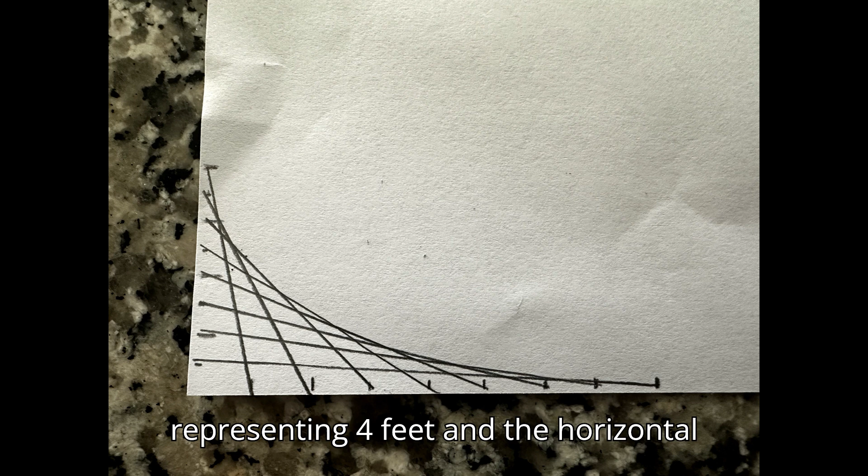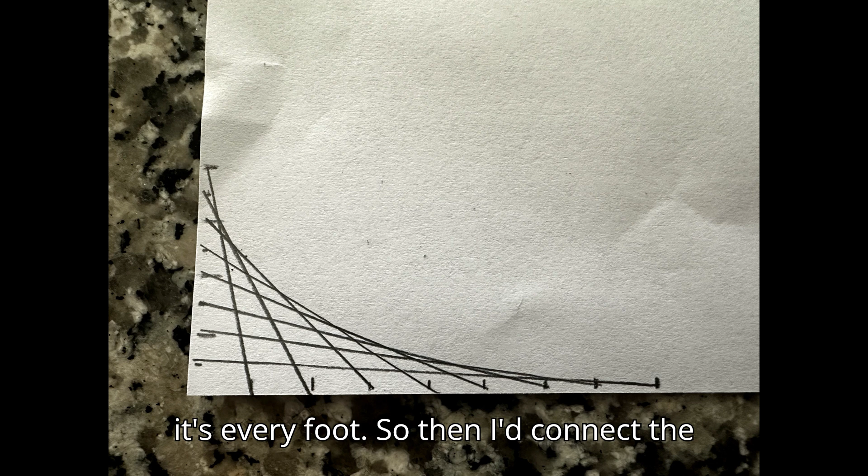This is how I made transitions in high school. I had no idea how to do it. One day I was in class and I was playing around with this idea. And what I would do is, if you look at the vertical representing 4 feet and the horizontal representing 8 feet, I would divide them up into equal amounts. On the vertical, it's every 6 inches. On the horizontal, it's every foot. So then I'd connect the lines, and as you can see, it makes a nice little transition.

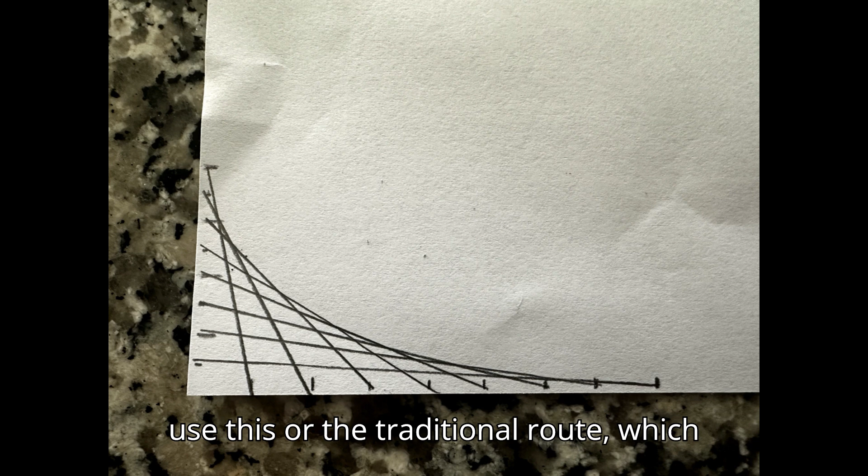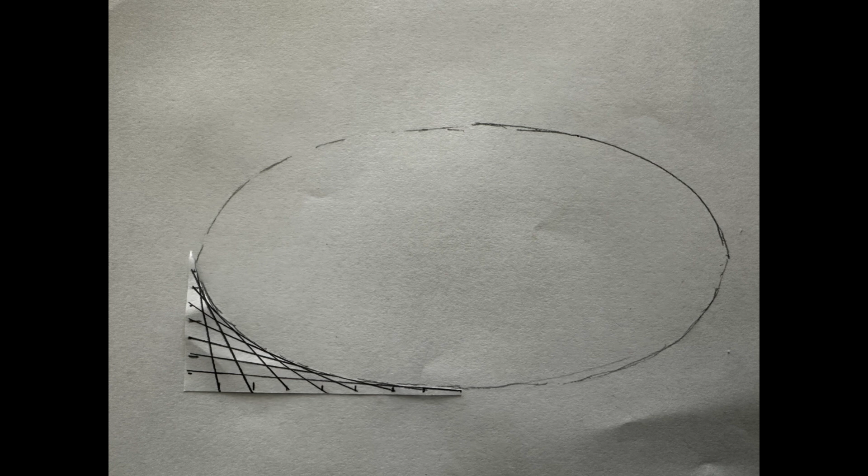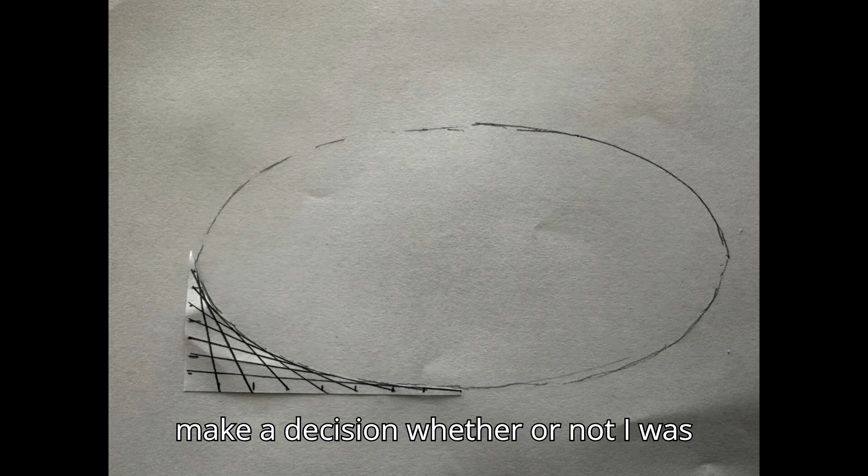This is what a lot of skate parks use. And snowboard half pipes tend to be elliptical. So I had to make a decision whether or not I was going to continue this idea or if I was going to go the traditional route and use the radius of a circle. So what's a better transition? Is it the radius of a circle or an ellipse?

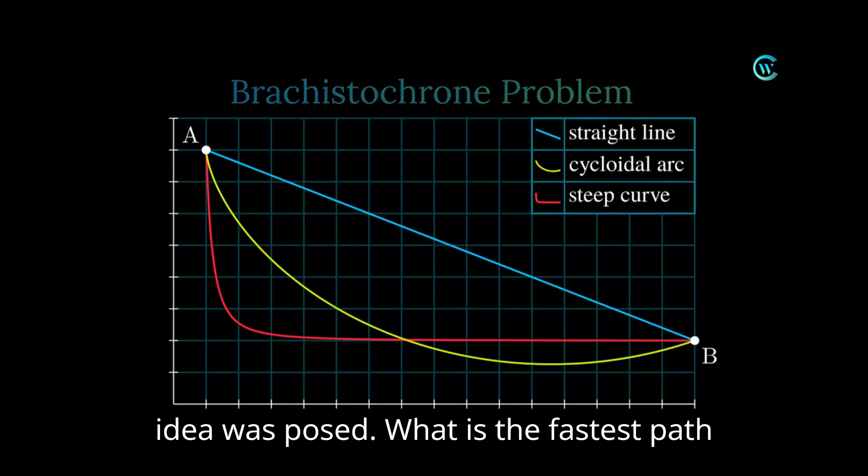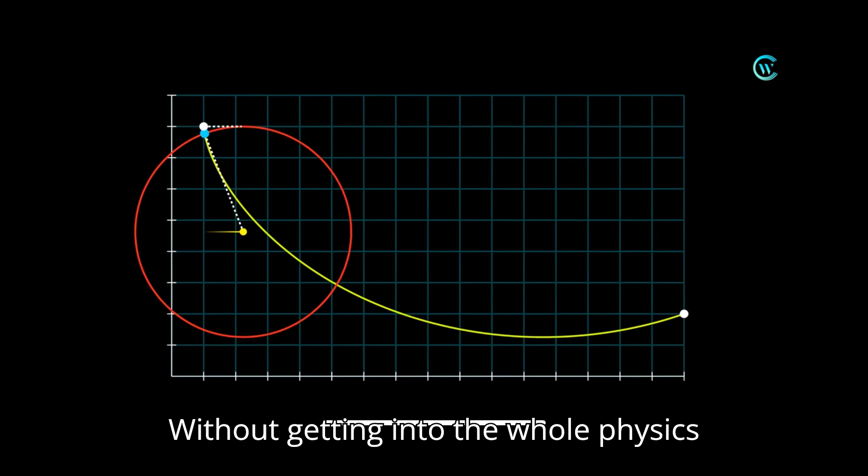And this brings you back 400 years ago to the brachistochrone problem, where the idea was posed: what is the fastest path from A to B? And you can see it here. Is it a straight line? Is it a cycloidal arc, or is it a steep curve? Without getting into the whole physics mumbo jumbo of it, the cycloidal arc is the fastest route from point A to B.

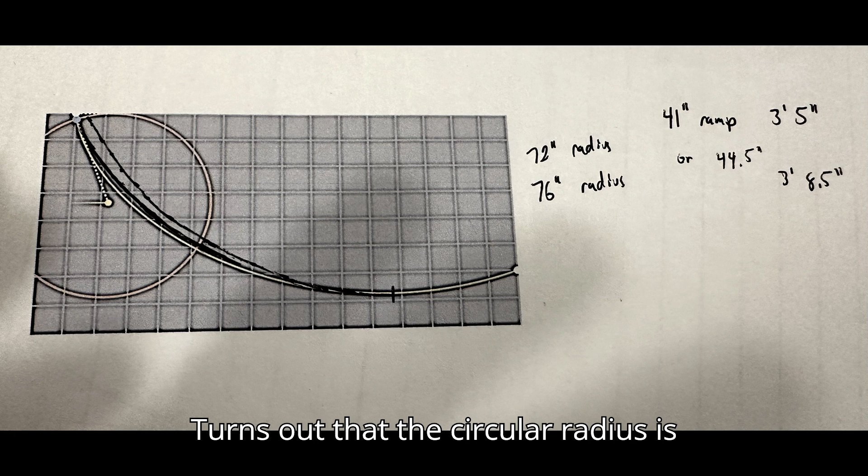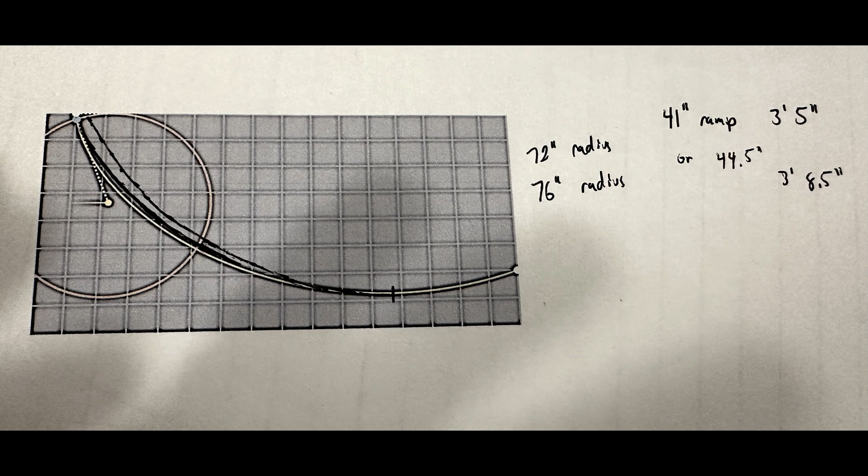Turns out that the circular radius is closer to the cycloidal arc than the elliptical transition that I was using in high school. In fact, here in this picture, I transcribed a 6 foot and a 6'4" radius, the 6'4" radius being the closest to the cycloidal arc.

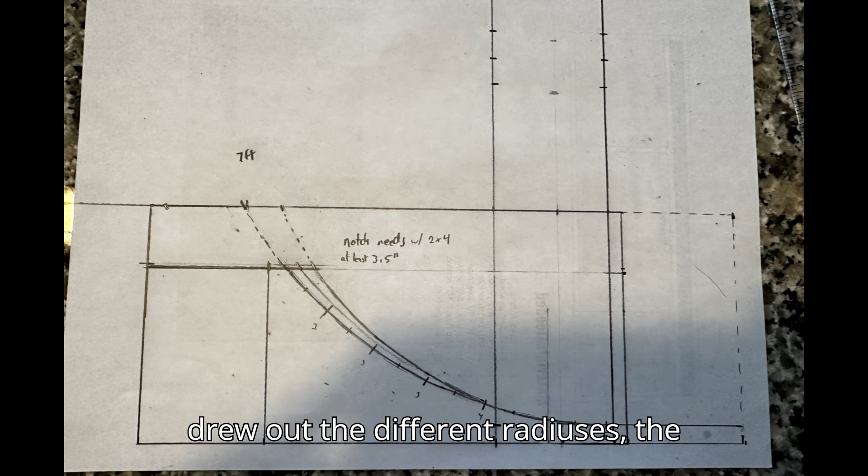But then I entered the rabbit hole of, is it better to have a mellow or a fast ramp? What's the best for a 2.5 foot or a 3.5 foot or a 4 foot ramp? And here I drew out the different radiuses, the steepest radius being 6 foot, the one in the middle being 6.5, and the more mellow one being a 7 foot radius.

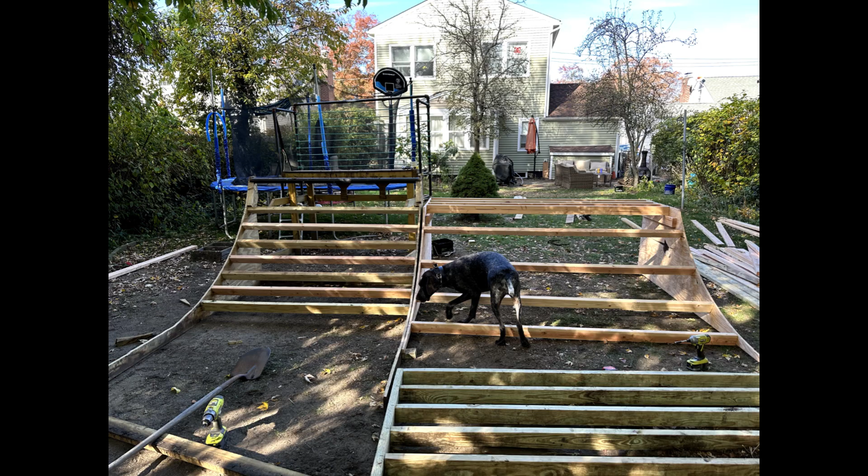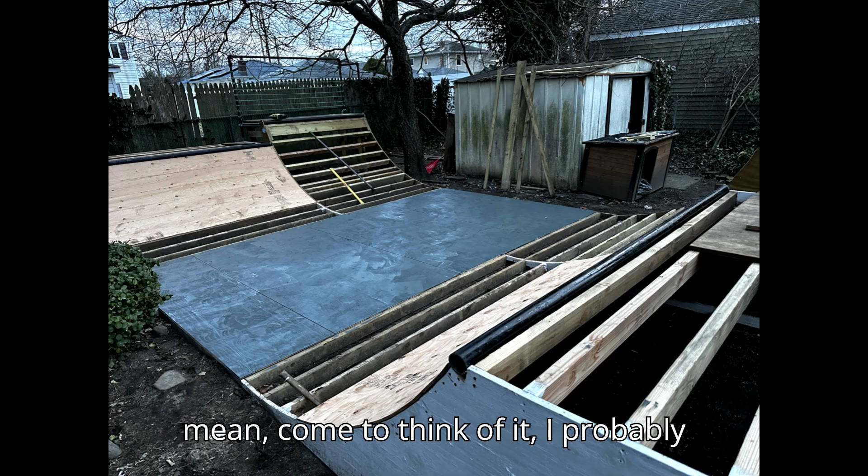So what's the whole point of this video? Well, it's showing you my thought process and how I chose the radius which I ended up with. Am I happy with the 7 foot radius? Yeah, I guess so. I mean, come to think of it, I probably should have gone for a 6.5 foot radius. I don't know how much of a difference it makes, but you have to make these decisions before you start building.

Okay, so you want to think about everything. Do you want it to be easy? Do you want it to be fast? Do you want it to have a little bit of steepness to it? Those are decisions you have to make before you start building.

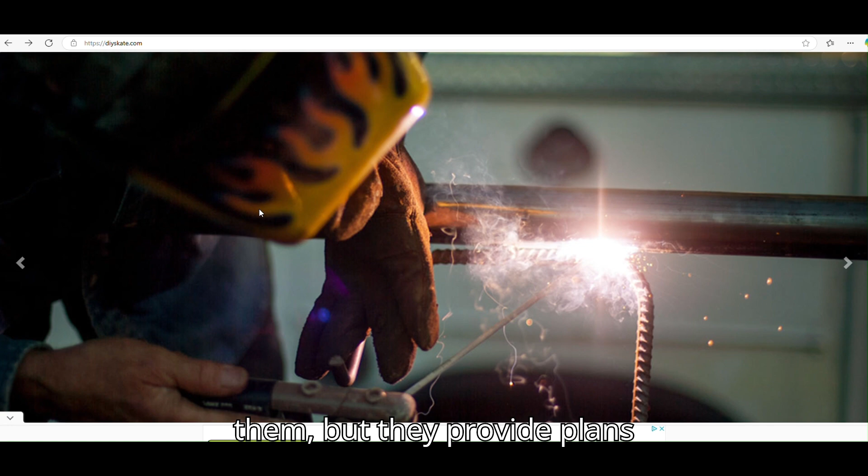Or you can go to this website, DIYskate.com. I have no affiliation with them, but they provide plans for what I think is a nearly perfect half pipe. Check this out. So if you go to their DIY ramps and you go to the 3 foot mini, you click on that, get rid of this ad, it'll tell you everything: where to get the supplies, materials needed, tools needed, location, how to build it, what cuts to make, how to do your transition, how to get your radius, framing it, and everything.

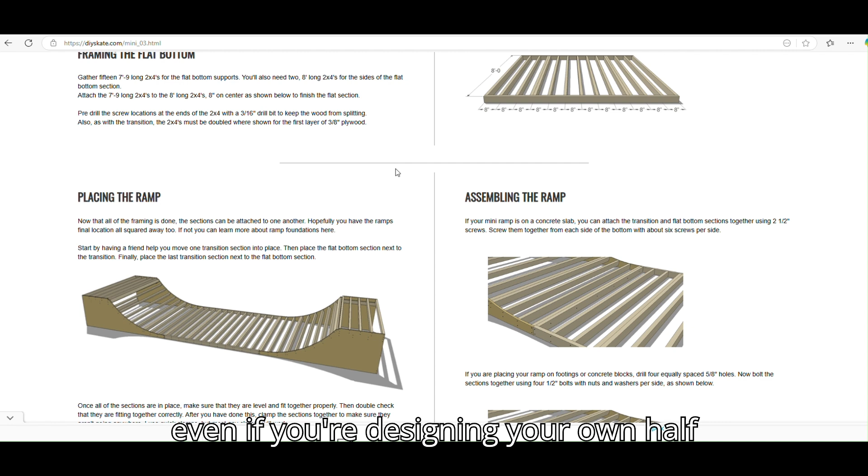The only thing I would change about this is it has a really long flat bottom. The reason why I know this is that's what we built for my son's friend's dad's ramp in their backyard, and I think the flat bottom's a little too long. Maybe cut it down another foot to about 7 foot. But I can't say anything bad about this. This is a great plan, and it's definitely something you should look at even if you're designing your own half pipe, because they give you some great tips here.

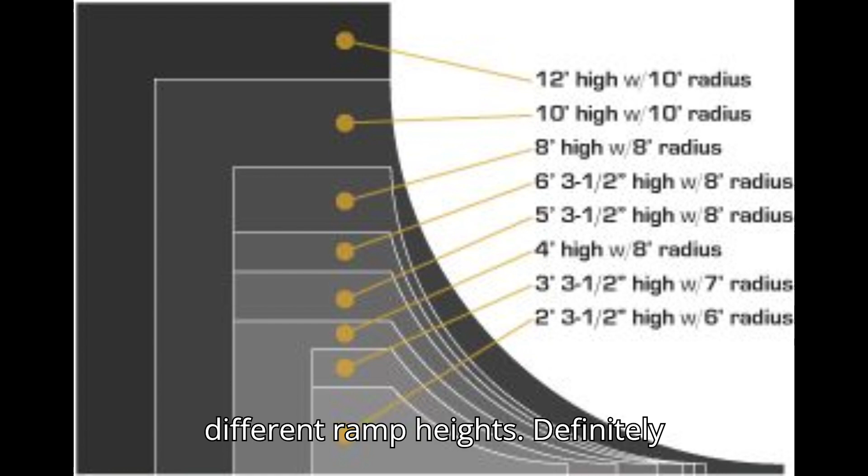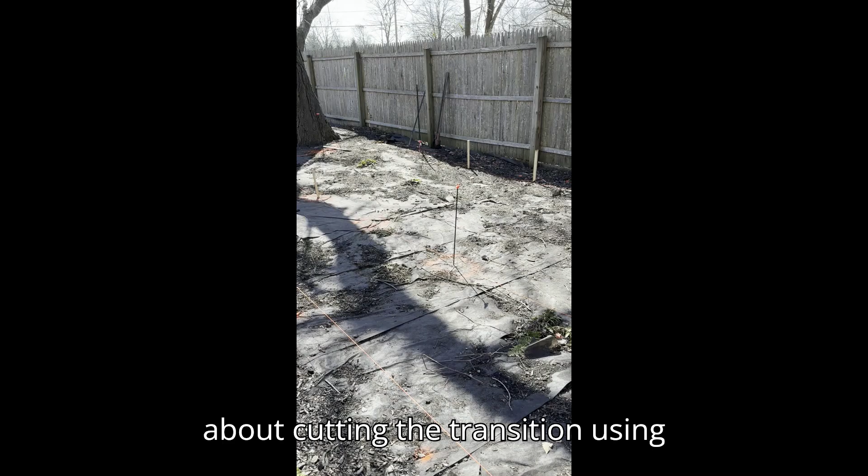As we come to the conclusion of this video, here's an image I found off the internet showing different radiuses and different ramp heights. Definitely something to consider and check out. My next videos are going to be about siting the half pipe, finding a good place for it, lifting it off the ground, getting the airflow underneath it, and about cutting the transition using my very unique way of doing it.

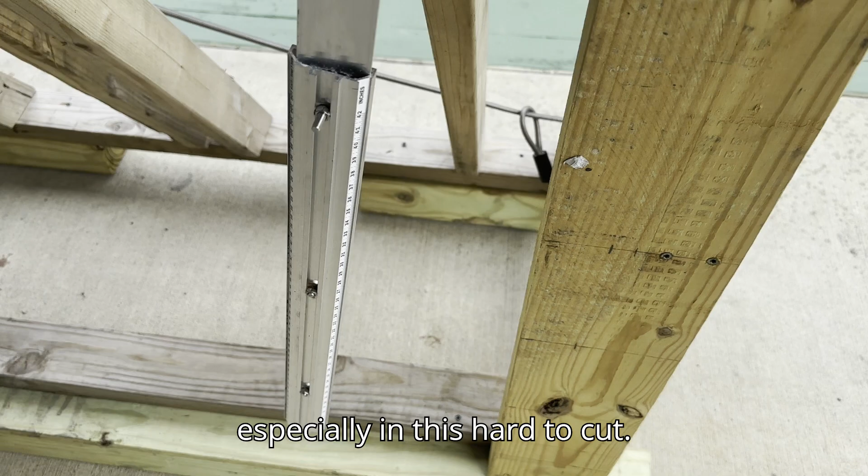I used a router on a pivot, and it gives a really nice clean cut, especially in this hard to cut pressure treated plywood. Jigsaws, they're tough to use. They always travel, and then you end up spending more time sanding it down to match them up. This gets it perfectly.